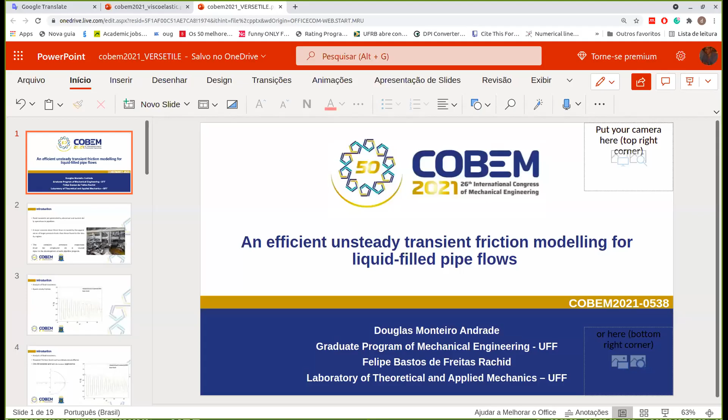I'm going to present a work called An Efficient Unsteady Transient Friction Modeling for Liquid Filled Pipe Flows.

My name is Douglas Monteiro Andrade. I'm from the graduate program of mechanical engineering at Universidade Federal Fluminense. This work is co-authored by Felipe Bastos de Freitas Rachid from the same university, a professor of the Laboratory of Theoretical and Applied Mechanics at this university.

So fluid transients are generated by abnormal and current daily operations in pipelines, but they just don't happen randomly. Pressure loads generated by this phenomenon are really greater than the steady flow regime. For that reason, a solid knowledge of fluid transients is important for the design of pipelines.

Here is a figure showing the power of destruction of this phenomenon. The onset of this tragedy was a transient flow, an uncontrolled transient flow. This is a picture from the Russian hydropower plant.

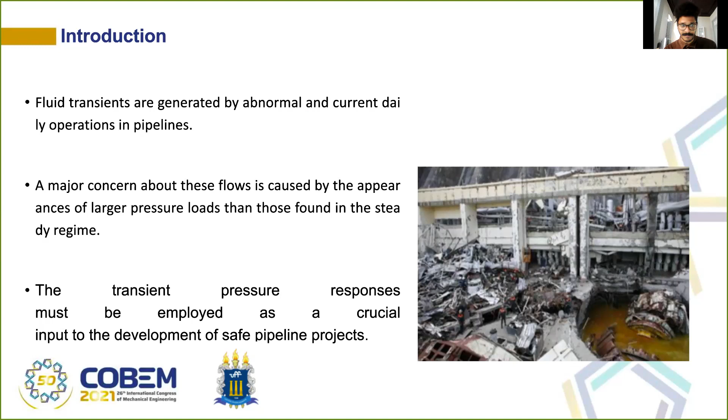Historically, the analysis of fluid transients was made by applying the quasi-steady friction. That means the modelers used the same friction equation applied in fully developed flows. However, as you can see here in this picture, comparing with the experimental data of Adamkowski and Lewandowski, this analysis generates overestimated pressure response, and the phase is not also captured by the modeling.

The explanation for that is that the equations of fully developed flows are based in average velocity, which does not capture the distinguished velocity profiles that we find in the transient.

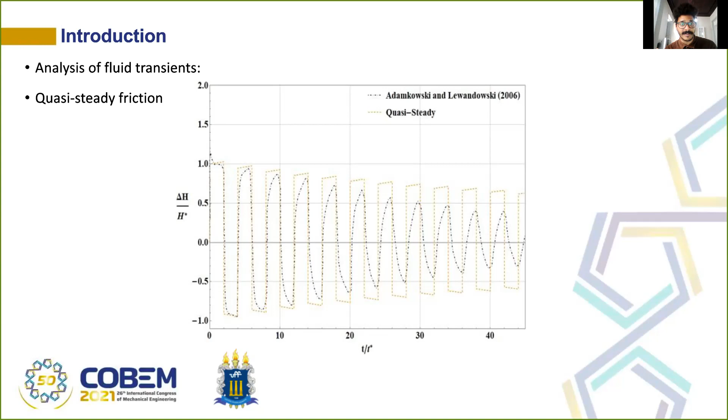As you can see in the next slide, observe that high gradients of velocity are found during the transient. So if you use the average velocity of the flow in the fully developed equation of transient friction, you can't capture this behavior. And that's why those responses of the experimental data in the quasi-steady friction are really different.

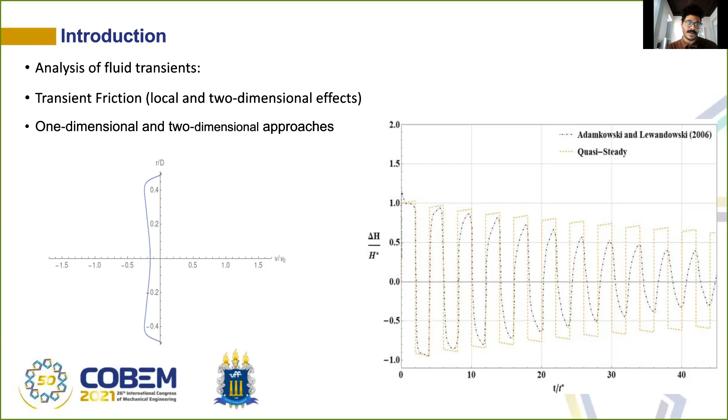So to overcome this limit of using the quasi-steady equation, researchers propose different approaches to capture this local and two-dimensional effect of the velocity profiles of the flow during the transient. There are basically two different approaches regarding the coordinate: one-dimensional and two-dimensional approach.

Each approach has advantages and disadvantages. For the one-dimensional approach, the main advantage is the low computational cost and easy computational implementation in practice. However, it does not see the internal structure of the flow, velocity profiles, and shear stress profiles that are really important for some hydraulic applications. In some cases, the approach doesn't seem to obey the second law of thermodynamics.

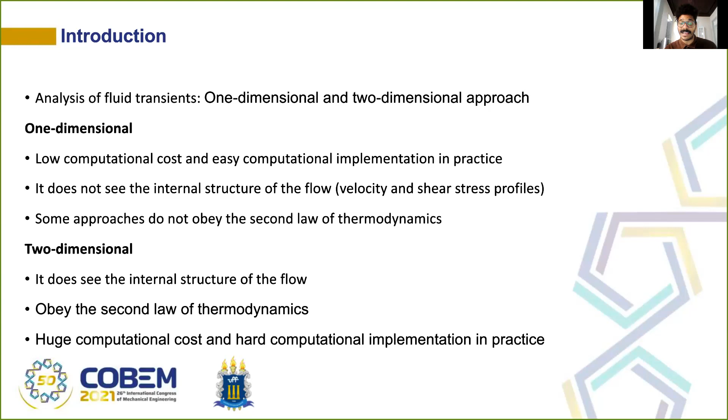In the two-dimensional approach, it does see the internal structure of the flow and obeys the second law of thermodynamics. However, there is a huge computational cost, and it's hard to implement computationally in practice.

So here goes the main goal of this work: to propose a thermodynamically consistent model that gathers the advantages of both modeling approaches. In other words, easy implementation while still being one-dimensional, but that can see the internal structure of the flow and obey the second law of thermodynamics. We will do that with the use of the continuum theory of mixtures.

So let's start. The standard phenomenon is fluid flow inside a compliant pipe. The pipe is assumed to be thin-walled, slender, and the behavior of the pipe is elastic in the small deformation range. The fluid in this kind of modeling is assumed to be a mixture, a structured mixture formed by shell-shaped constituents, as you can see in this picture.

So indirectly, the velocity profile of the flow is captured, then the friction that is actually happening during the transient is captured.

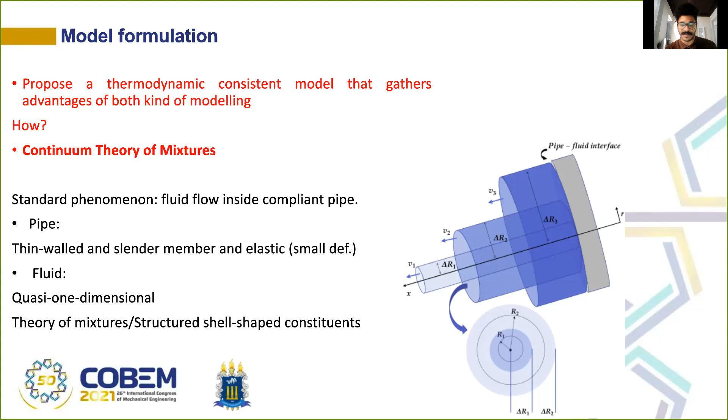The governing equations of the model are the mass balance for the mixture as a whole, the momentum balance for the mixture as a whole, and the momentum balance for each constituent, which is required for a well-posed problem when you use the mixture. That is exactly where the velocity profiles of the flow are captured. And as we are also seeking the thermodynamic consistency of the model, we also postulate the second law of thermodynamics for each constituent and for the mixture as a whole.

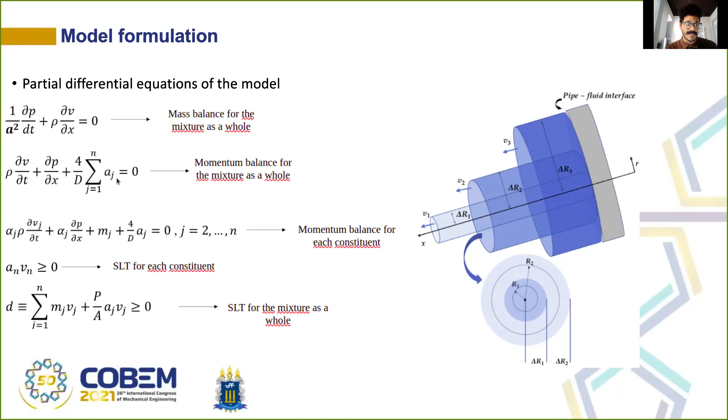There also appear interaction forces, AJ and MJ, which I will explain. AJ represents the friction force that happens between the fluid and the pipe, meanwhile MJ represents the interaction force between the internal constituents, as you can see in this picture.

The constitutive equations are developed obeying the objective principle in the kinematic aspects of the mixture, such that the constituents can slide each other in the direction of the pipe center line.

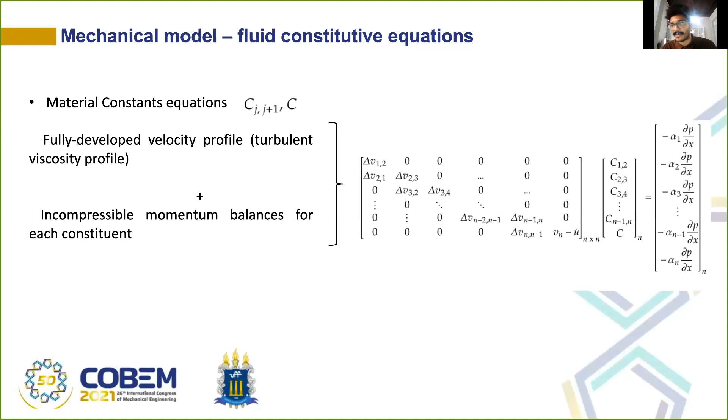And in fact, here go the material constants of the model, and as they are positive, the model is thermodynamically consistent, as you can see in this slide. If the material constants of the model are positive, the model obeys the second law of thermodynamics.

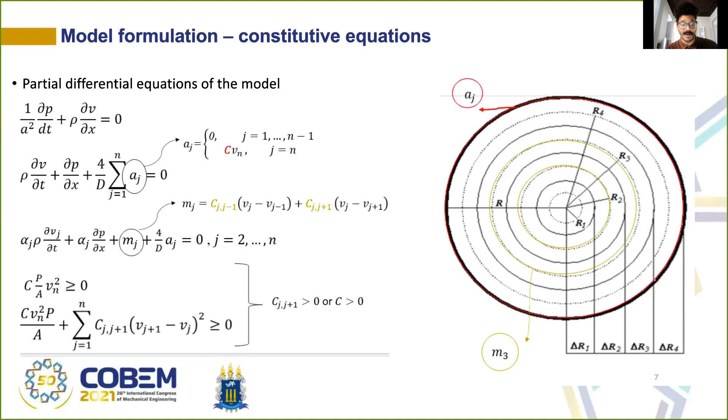So the numerical methodology: as the governing equation forms a quasi-linear hyperbolic system, we apply the method of characteristics to transform this partial differential system of equations into an ordinary system of differential equations, and then we integrate the systems along the characteristics, as represented here in this figure.

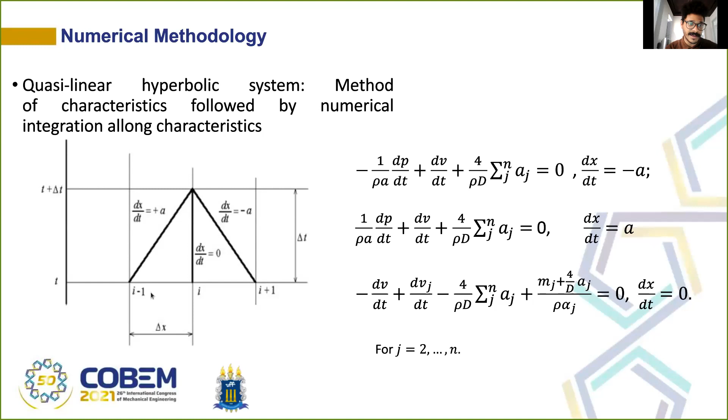So we wanted to turn this model computationally efficient. So we will do, in the following, an analysis of the distribution of the constituents, a number of constituents. This strategy is basically: we will see the responses for mean pressure, mean velocity, velocity profile for two different meshes, one uniform with 5, 10, 40, and 80 constituents. Uniform, I mean same thickness - our constituents have the same thickness.

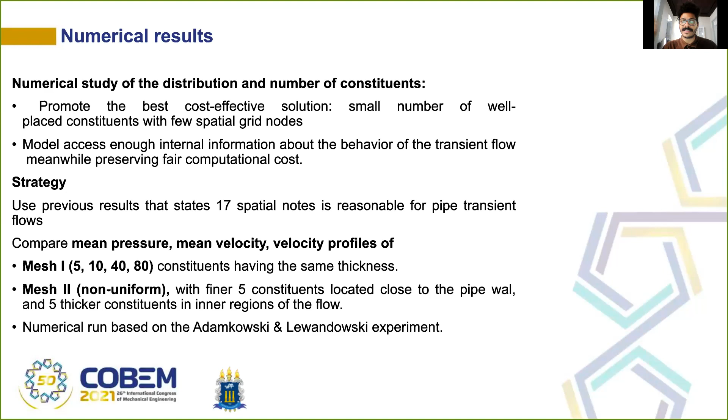And mesh 2, that is non-uniform. This mesh 2 will be formed by 5 constituents in the inner regions of the flow that are thicker, and finer constituents, 5 finer constituents in a region closer to the wall. Why do we do that? Because as you saw in the small video that I presented, there is a rise of high velocity gradients next to the wall, so it seems that that is the most important region of the phenomenon.

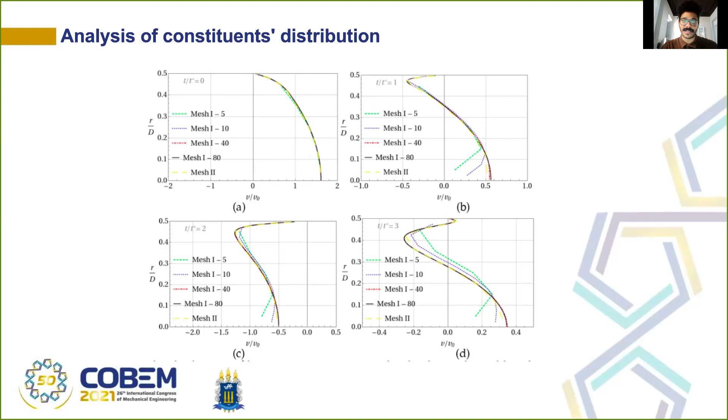And the same happens for the velocity profile of the flow. As you can see here, again, there are snapshots at non-dimensional times, and for all of them, mesh 2 has actually the same response as mesh 1 with 80 constituents. So again, the internal structure of the flow is captured, and the mean pressure and mean velocity are also captured. So mesh 2 is capable of providing

reliable transient response. And since mesh 2, the non-uniform one, applies a small number of constituents, fewer differential equations are solved, and then less computational time is required. And that is one of the main goals of the work. So we will analyze that further.

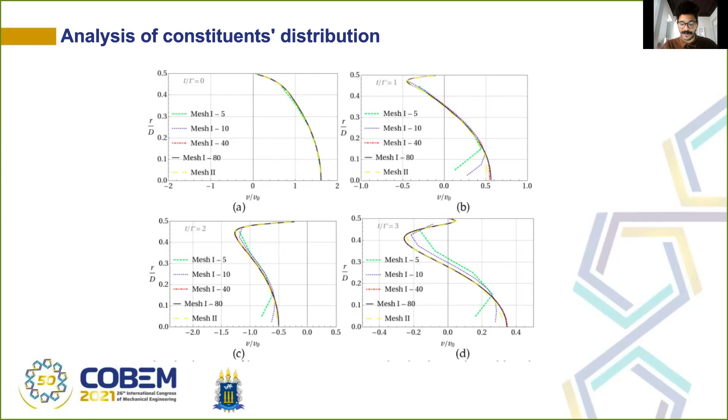So as I said, mesh 2 is enough to get a precise and quite reasonable transient response. And to assess the ability of this settlement - in other words, the use of mesh 2 - in providing accurate results, we will compare the response of this proposed model with the two-dimensional model of Riasi et al., which applied the turbulence model K-omega. We will also compare the CPU computational time, taking as reference the numerical run carried out by Duan et al., which applied a 2D 5-region turbulence model of Vardy.

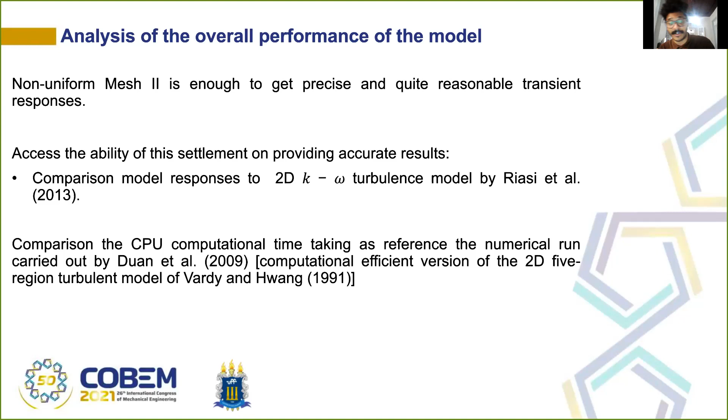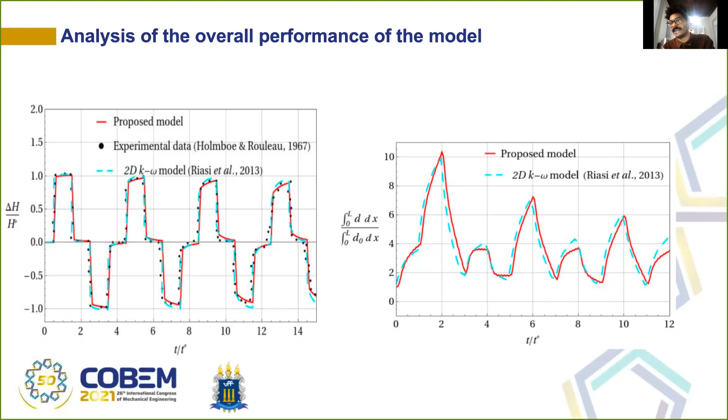That means the internal structure of the flow is fairly captured, because the dissipation is basically created by the internal forces that happen in the flow, in the model, between the structural shells that slide against each other.

And computation is really efficient because, as you can see here, the model runs about 50 times faster than the model of Duan and gets basically the same results. And Duan compared his model with others found in the literature and found that it is, for example, 300 times faster than the model proposed by Vardy and Brown.

In other words, it seems that the model can actually see the internal structure of the flow, provide fairly accurate response for the mean values - pressure and mean velocity - and is quick.

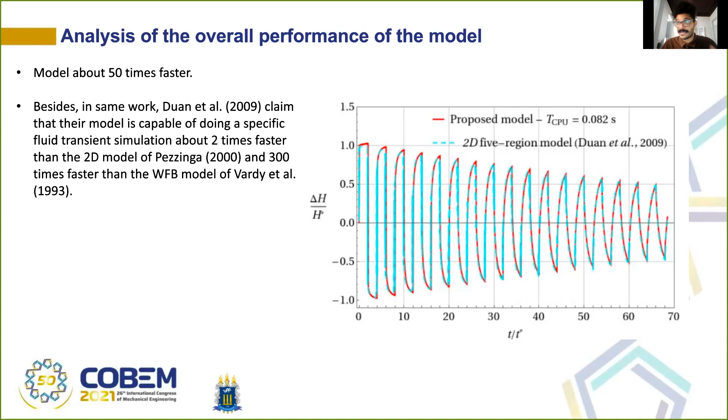So I'm going to the conclusions right now. This work presented an unsteady friction model based on the theory of mixtures for describing turbulent transient flows, and the model is thermodynamically consistent, quick enough for real-time applications, and can see the internal structure of the flow. So it can be used for a large range of applications in hydraulic analysis.